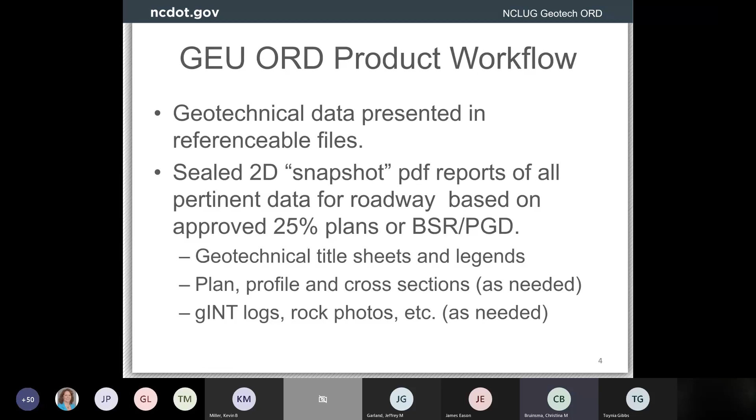We are currently working on updating our workspaces, and we do plan on maintaining that workspace. And I do believe this has been a pretty hot topic recently about maintaining a workspace on ProjectWise. But as far as I understand, zip files will still be available to be downloaded that will have our pertinent gINT files and any ORD files that will be necessary to create a product.

Now we're going to get into the nitty gritty for ORD. A lot of these developments have really come to light over the past couple of weeks for us.

Something you'll probably note in any of our unit work as we plan to work within ORD is making sure that you select as a geotechnical user. You can work as an all user, but if you work as a geotechnical user, it can narrow down a lot of the choices and the data you have access to. It might even increase your speed as you work on a geotechnical product.

So a workspace would be selected, your work set would be created for a project, and then you would proceed to create a 2D file. That 2D file will be working specifically with your seed files available in your Connect workspace. You would use the common naming conventions that we've been using at Geotech for a long time. So once that is created, you will get a 2D file that you can reference in.

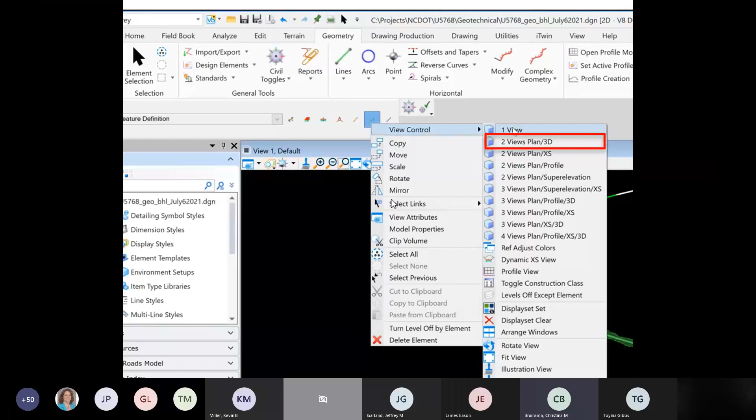In this particular project, we had information that was a GEOPAK in a TIN file. As we continued moving forward in ORD, you'd probably be looking at terrain models for existing or proposed. For this particular project, the majority of our geotechnical data was along our Y4 alignment. During our work on this, we imported the alignment and the TIN file, which created an alignment and TIN file on the 2D display.

And then all that needs to be done is right click and request two views, plan and 3D, and that will automatically create a 3D view within this particular file.

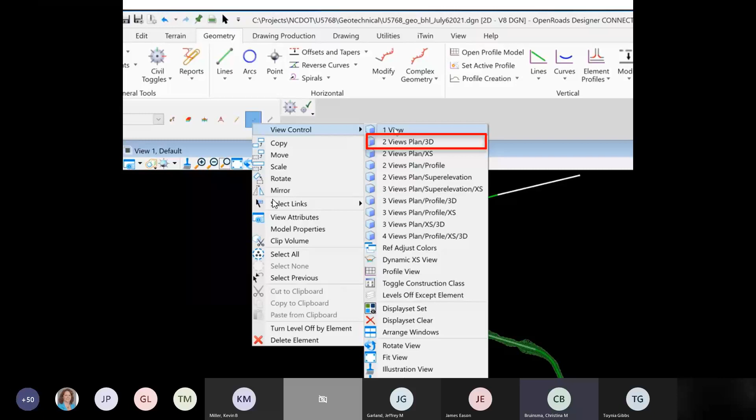Once you've got that 2D and 3D view, there's going to be a multitude of data views and inputs that can be created between plan, profile, cross sections, and stratigraphy as well. So as you move and create that, you'll see in this next slide that you've got a 2D view here on the left, and a 3D model over here. You can change your view specific to preferences and things like that as needed.

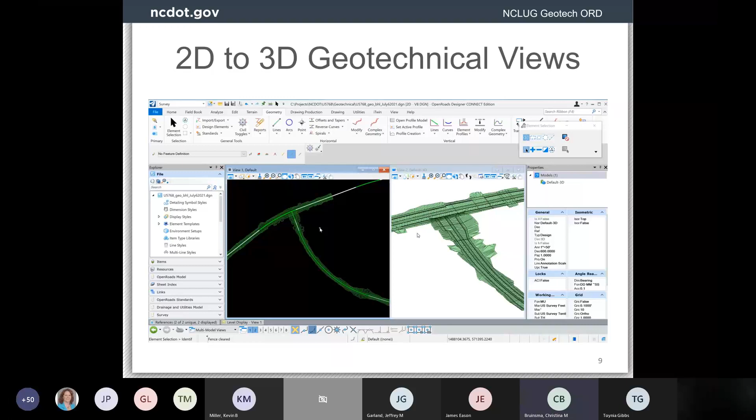So this is probably the best place to start with moving on from the survey workflow. You'll see up here that we've currently been in the survey workflow, used the import export, and from that point on, we can then move into the geotechnical workflow in ORD.

At that point in time, we can bring in, in this particular case, a database connectivity, and we can bring in our GINT file through this particular window. In addition to that, we also associate an XML file. What that does is work very similar to our old preference files. If you're familiar with our SS2, SS4 methodologies, it remembers all of the settings that you would apply in the GINT Civil database connectivity window.

So you'd be looking at your DGN libraries, your cell libraries, holding things like level names, display rules, feature definitions, item types, cells, and that kind of thing that's going to be housed in our workspace.

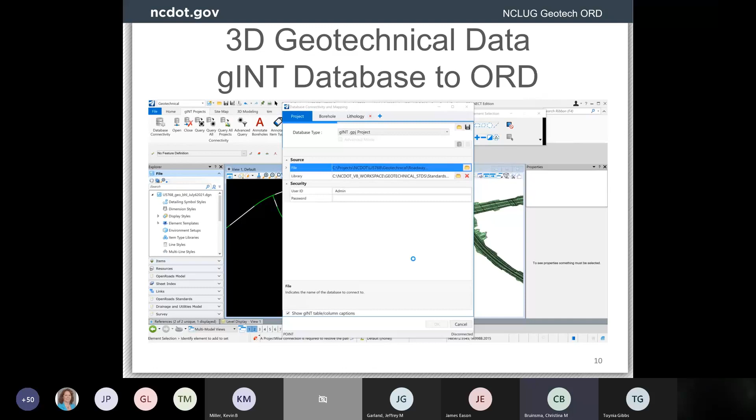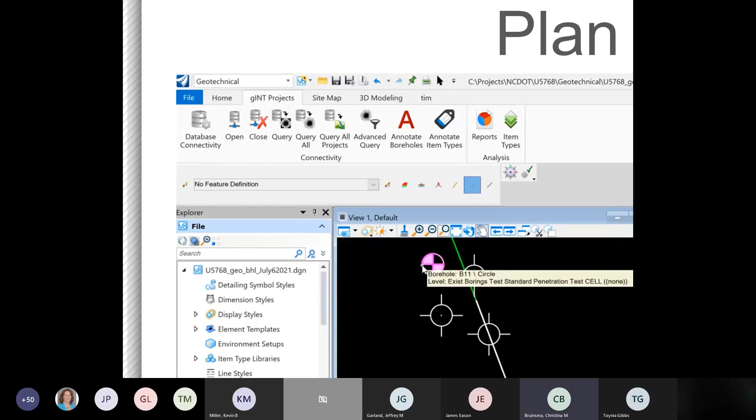So once that's been completed, you can then run, and I'll zoom in so you can see the geotechnical workflow and your GINT project. You would then query these points, and they'll come in. You can actually see that there's intelligence within each of these boreholes where you can see the name, the level, and the like.

Once you've queried those in, you can actually see all the borings in the alignment here, and then we're actually going to view all of those in the 3D model. As the 3D model is active, you can then query all of those points again, and you'll see that these cylinders will come in, and then you just tie it into the terrain that it needs to be tied into. Please note that on this particular demo, it was tied into the proposed, but normally it would be tied into the existing terrain information.

You could actually see in this one that you can rotate it, you can see the cylinders, and from that point, now you've got a plan view, you've got a 3D view that shows all of our borehole symbols and cylinders.

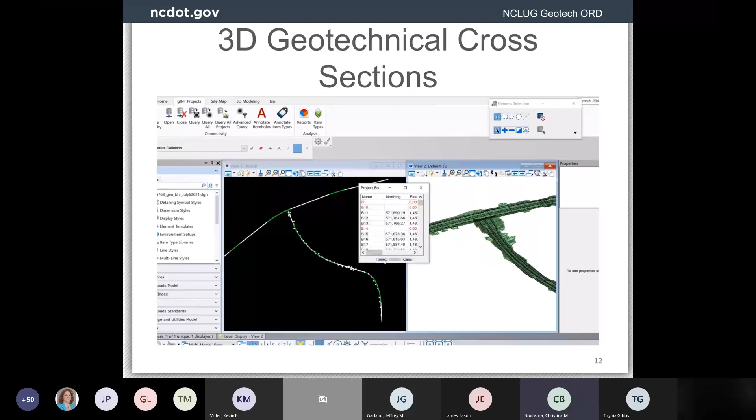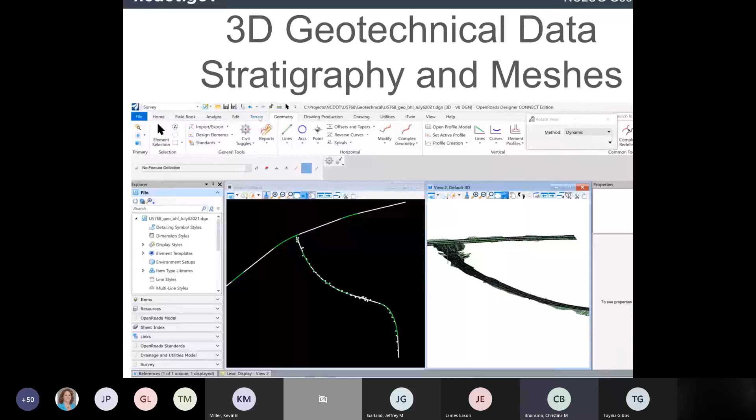And the next step that we're thinking about and working on developing, and you'll see in this video, is creating stratigraphy and meshes. So once you've gotten all of your data into a 3D view, at this point...

We're going to go again, working in the geotechnical. You can create a mesh and select your lithology, use all of your interpretation and borehole points, and it will create your stratigraphic meshes. Now, this is still in working process, but if you take this and then change your view to a 3D view to see the cross sections...

Then it can bring in your additional view, and you can see it in cross section. So again, I'm going to play this again so you can kind of see going through here: create a mesh. It's going to take the lithology, all of those points, run it through.

Now, as far as we understand the stratigraphy meshes, we should be able to mimic terrain in version 10 of ORD. We're still working on looking through that, and obviously we'll be working hard to see how we can make more intelligent stratigraphic models in ORD.

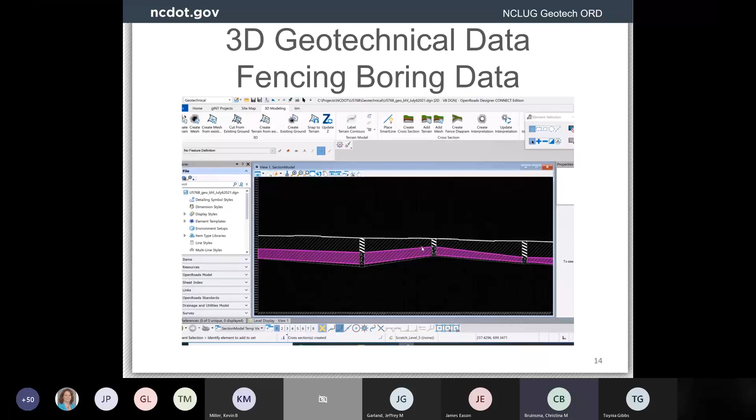So in this particular case, it's kind of more of a fenced application, but when you're talking roadways, we're looking at hoping to batch out our cross sections. So the next slide that we'll see is actually taking and creating a multitude of cross sections.

Now, previously, what we would do is place our borings in, and they would project back or forward to the closest cross section, typically at a 50-foot interval. What we're noticing and looking at now with ORD is that it is very advantageous to have it create cross sections at point events or borings.

So in this particular case, we select our boundary. We can select our roadway cross-section files so that when we create the sheets, they'll come in on the files that have been created by roadway. And then we can select our points, in this particular case, our boreholes.

So once we've created our event point list, and you'll see that coming up here in a second, and we're still working out some bugs on this particular function, but basically we'll select a point event, and it is going to draw cross sections through every boring on this project. So if you can see that it kind of puts, you can actually see the cross sections here. They're perpendicular to the alignment, and they have been created across the entire Y4 alignment. Each of these slices are going through our boreholes.

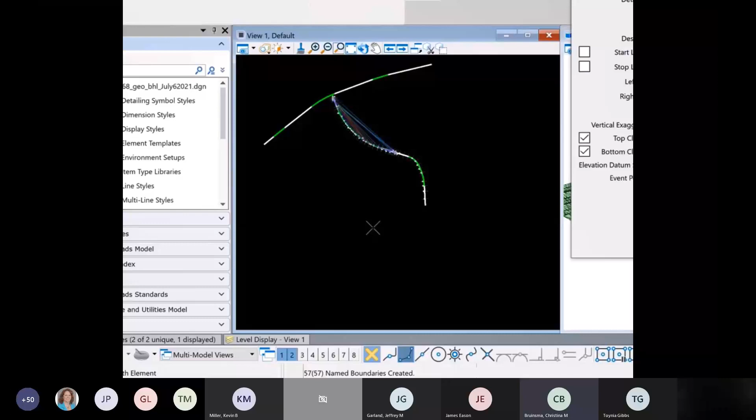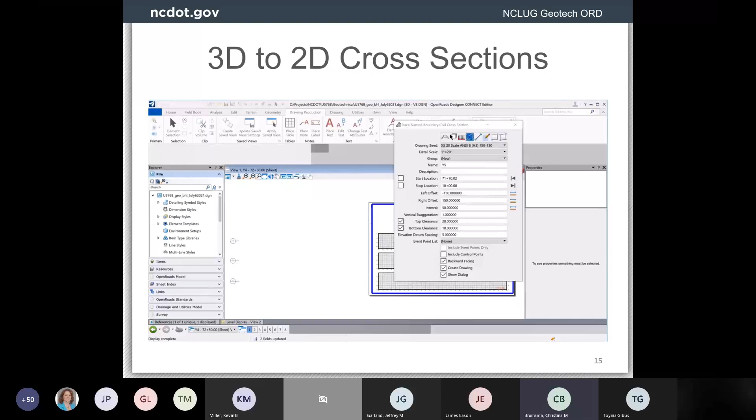And at this point in time, then we can create the sheets. And as that processes, I cut a little time out of there so we don't have to wait for it—it does take a bit for it to build those cross sections—but here you'll see that the cross section sheets have been created, and you'll see the stratigraphy coming in and the boreholes displayed.

And something that we're kind of working on right now is making sure that those cross sections will show. Now, what you're seeing here, you're seeing in 3D the slices that have been created, and in 2D you can see the cross sections in plan.

Obviously, it wants to make a cross section at each point event. So you may have a boring that's at 12 plus 0.5 and one that's at 12 plus 0.0. At this point in time, it is going to create a cross section at each of those event points perpendicular to the alignment that you selected.

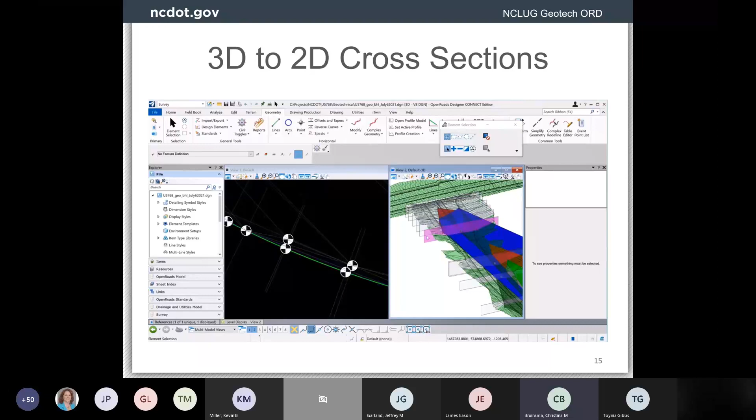But the good news is that when you create these slices in the settings, it should accommodate however deep your boring is, similar to the old clip windows and the intelligence that we had in Geotech creating cross sections. So you won't have any clip issues, and it should accommodate the full depth of your borings.

Make sure that I'm not missing anything there.

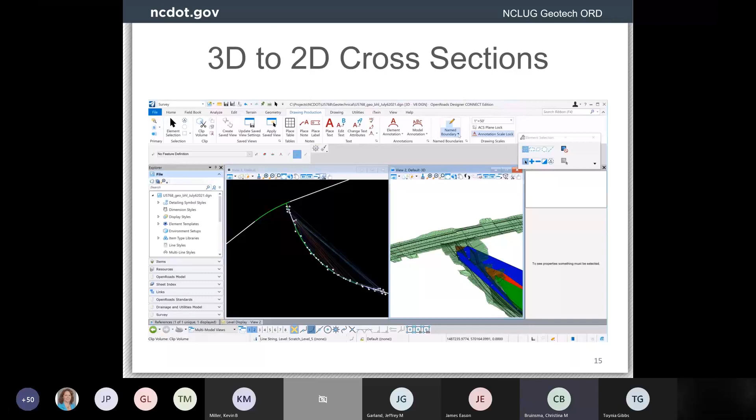So our future geotechnical engineering ORD targets, what we're still working on: we're trying to make sure we have consistent patterning for our 2D strips. We want to finalize our cells, our levels, and the XML that will be necessary to make sure that data

that we are creating in GINT is displaying properly as we start to work with said data in ORD. So once we get our AASHTO patterns settled, we also want to refine the stratigraphic and lithographic meshes, and make sure we're doing consistent batch annotations based on the item

types. In addition, we'll also be looking at our laboratory samples - on a roadway where you'd see the sample numbers above the boring that they're associated with - looking into seeing if we can script it so that data comes in when we bring in the data, as well as things like our water table data.

So we're all looking at refining those, but we've got good groundwork and a good start on that. Now we're trying to just fine tune how we're doing those. Once we've got that, then we can test it directly with additional roadway and structure projects within ORD.

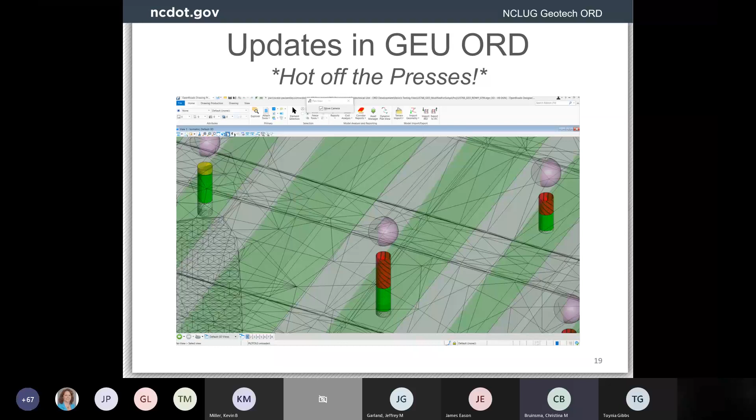So what you're seeing on this particular one is the same data that we were working with on this project previously in our examples. And you can actually see that there's patterning that in this particular case mimics what you would see in our legend, in GINT, and the like.

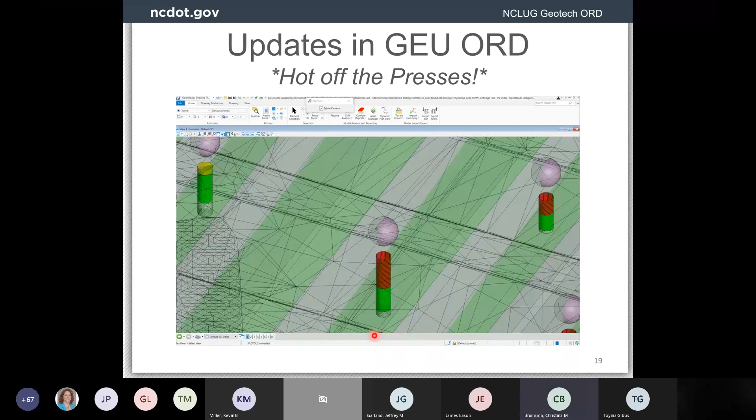So the next one is showing that we can even pattern the meshes. So when we create lithology strata breaks, they can even pattern across that whole area, and you still see in the cylinders as well with those AASHTO classifications.

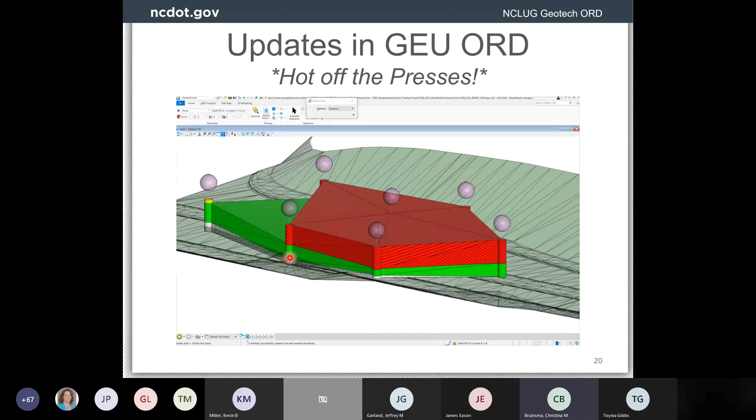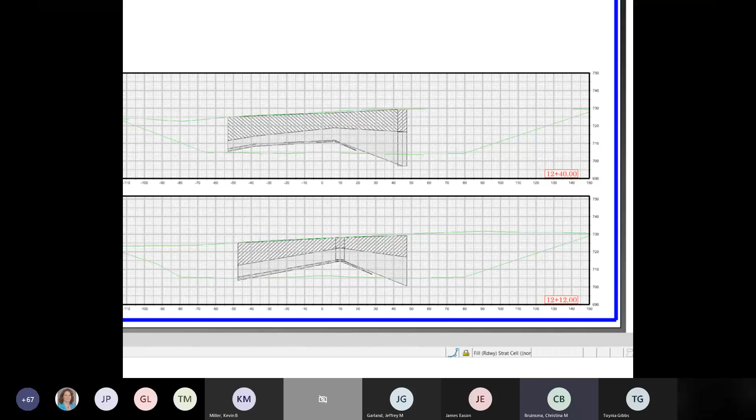And then when you break it down into cross-section sheets, we've had success in getting our cylinders to show all of our AASHTO classifications, and you can actually see the lithology is also patterned. But that's hot off the presses, just figured out with Kevin, and we're working towards making sure we've got consistency with our patterning, moving from a 3D view to a 2D snapshot product.

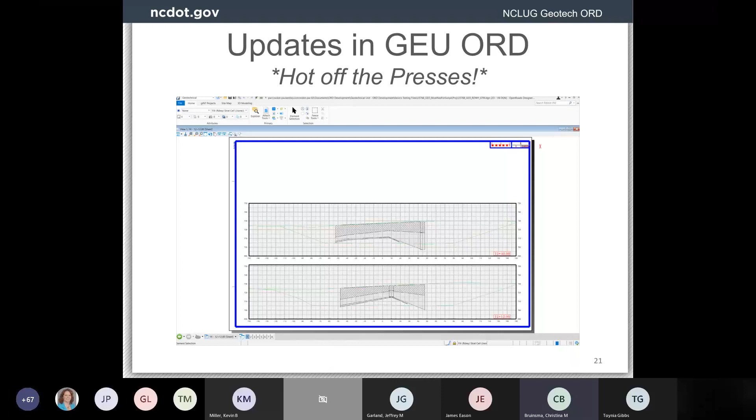So that's it for our update on geotechnical engineering's progress as far as working in ORD. I'd like to thank my team for putting this together pretty quickly.